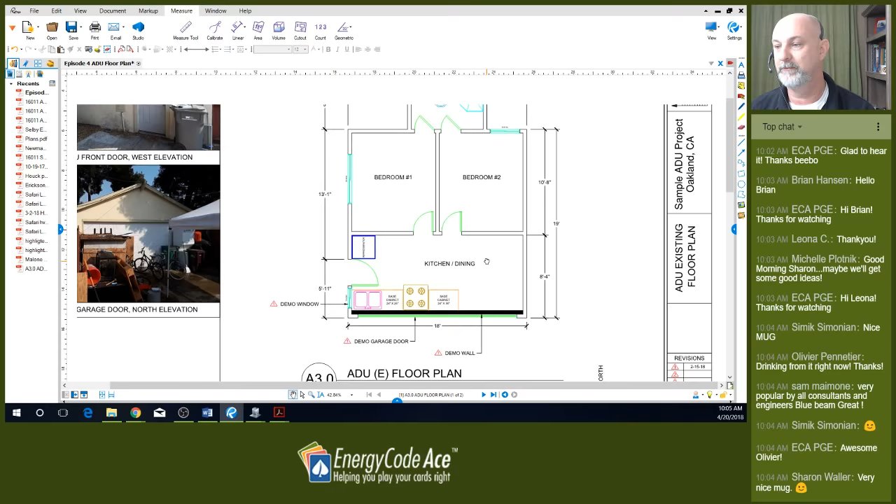It's a small garage that I believe was converted, and this is a code compliance issue. So they're going to be bringing this up to code and making it comply with the current standards. So very small ADU. It's an existing structure, and we're going to newly condition the space. So I wanted to bring to your attention some of the new information we've received from the Energy Commission.

I'm going to switch screens here and highlight the most recent Blueprint. This is issue 122, January-March 2018. You can go to the Energy Commission website and download this. Anyways, it's highlighting accessory dwelling units.

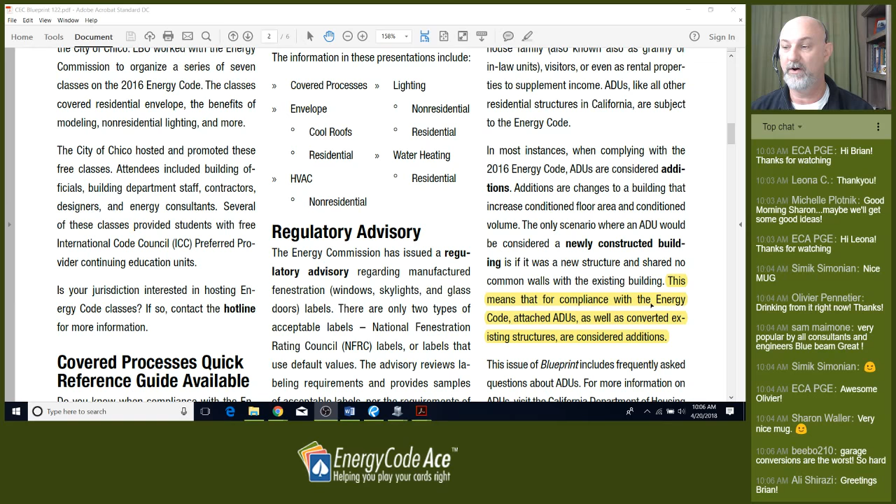So if you read through this, you'll see that a newly conditioned ADU, whether it's attached or detached, is considered an addition. It's not considered newly constructed. And if you see here what I've highlighted, this means that for compliance with Energy Code, attached ADUs as well as converted existing structures are considered additions. That has a huge impact on our compliance approach here.

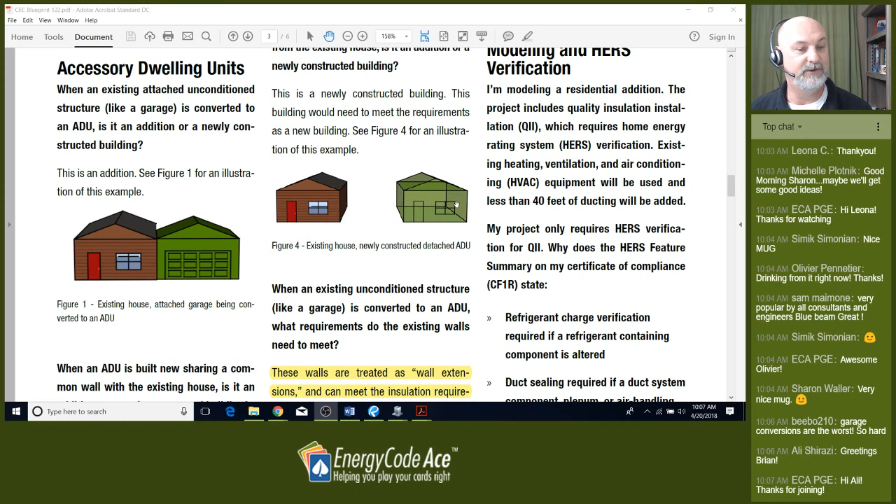So if you look through the blueprint here, it gives you some examples of what is an addition ADU, what is not considered an addition. If it's newly constructed, detached, that's new construction. So a couple of things to consider here, and we'll talk about the pros and cons of this, but if it's an addition, the Energy Commission says that all the walls of this addition are treated as wall extensions. If you're familiar with section 150.2(a), 1AI, and BII, this says that wall extensions can use the existing wall thickness.

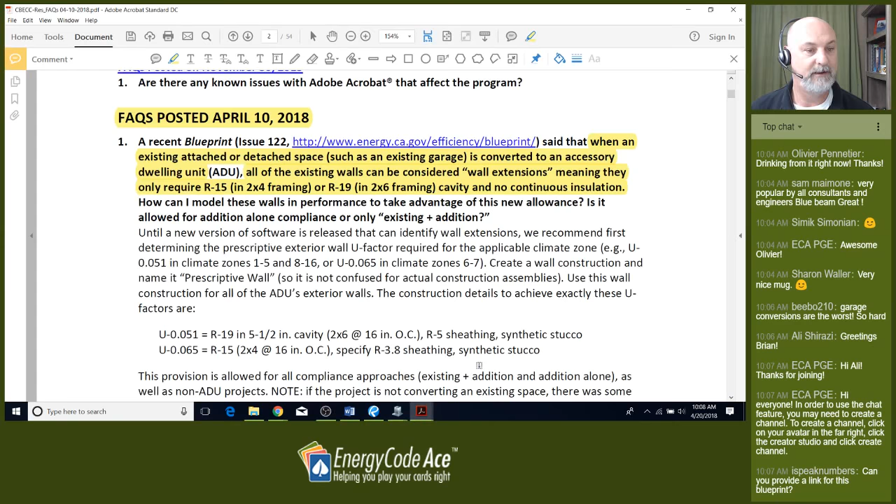So if you have a 2x4 wall, you're only required to put R15 in that wall. And if it's a 2x6 wall, R19 insulation in that wall. Now, that covers you for the prescriptive approach, and that may be a viable approach for this ADU. Today, we're going to be modeling it, and we have some new information. This is the CBECC-Res FAQ. This was posted April 10th, so 10 days ago.

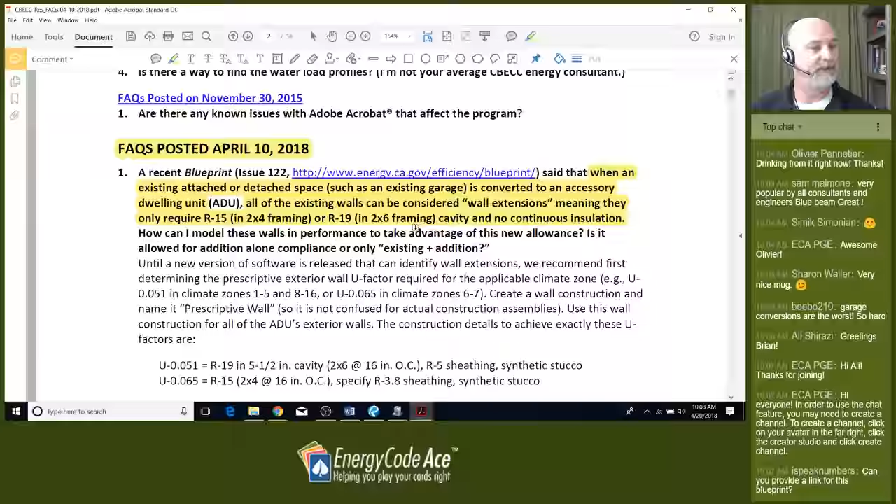If you haven't downloaded this, you can go to the CBECC-Res website, download the most recent FAQ, and it has some clarifications. So if you scroll down, you can see updated April 10th here. I'm just going straight to the title here. So a recent blueprint, that's the one we just looked at, issue 122, says that when an existing attached or detached space is converted to an accessory dwelling unit, all of the existing walls can be considered wall extensions.

Meaning that, here's our exception, R15 in a 2x4 wall, R19 in a 2x6 wall, and no continuous insulation. So the Energy Commission has issued the workaround on this, saying that if you have this situation, we know that the performance software cannot handle wall extensions yet. So in the interim, they've offered this solution. So model the wall based on the prescriptive requirement for your climate zone.

So if you're in any of the climate zones except 6 and 7, you've got to meet that 0.051 U-factor. And here's an example of a wall. This is the default wall for that 0.051 U-factor. And as well as if you're in climate zone 6 and 7, the 0.065 U-factor.

So the question here, a question about garage doors. What if one of the doors is a garage door? Garage doors are not going to meet the requirements here. You'll see here in a second on our ADU unit that garage door was removed and infilled with a stud wall. So yeah, if it's a garage door, your typical metal door is not going to meet the infiltration requirements nor the U-factor requirements.

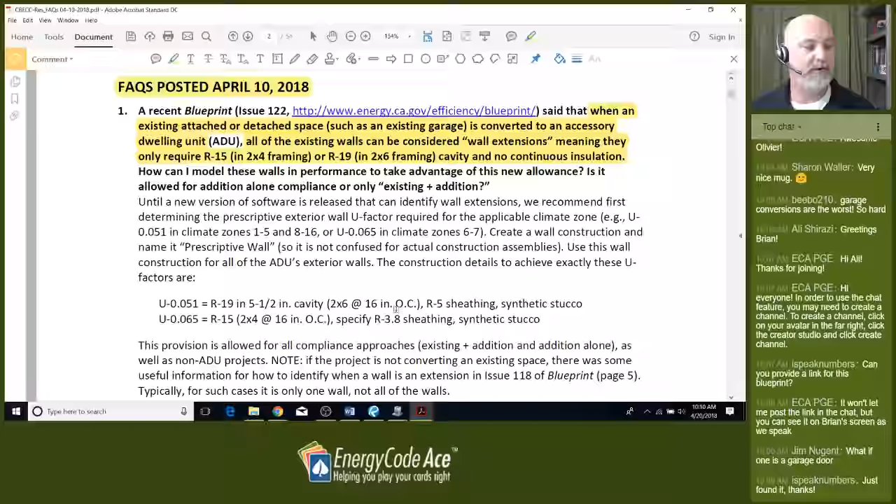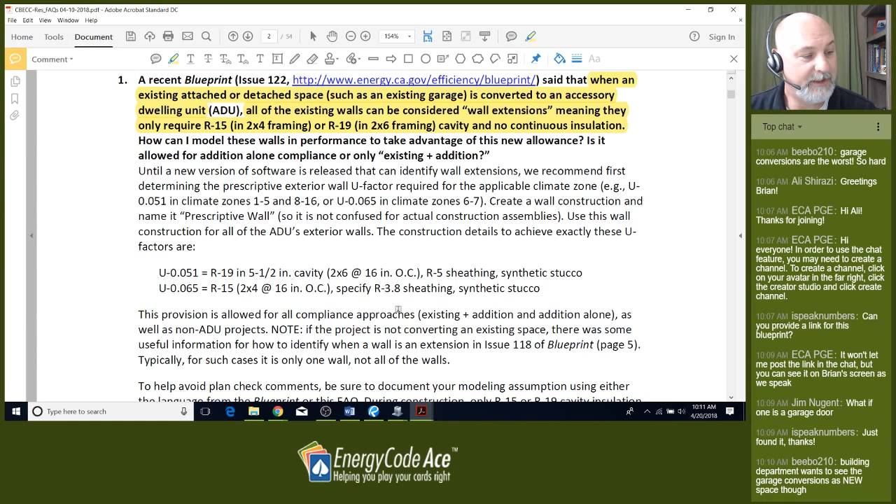All right, back to the FAQ here. So this is an allowable approach. It may not be the most ideal approach. You may have some pushback from the building department. They may say, explain to us how you did this. You modeled it with continuous insulation, but now you're saying it's not required. So the Energy Commission's given us some clarification on that, and I'm going to go over some of the wording that I used for this particular project to explain this away. I got a little bit more in detail than their comment of identifying the blueprint number and wall extensions and stuff like that.

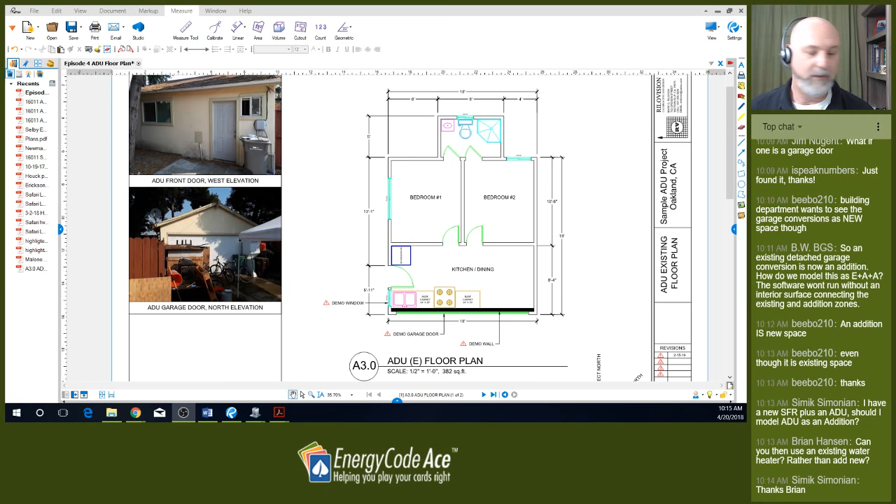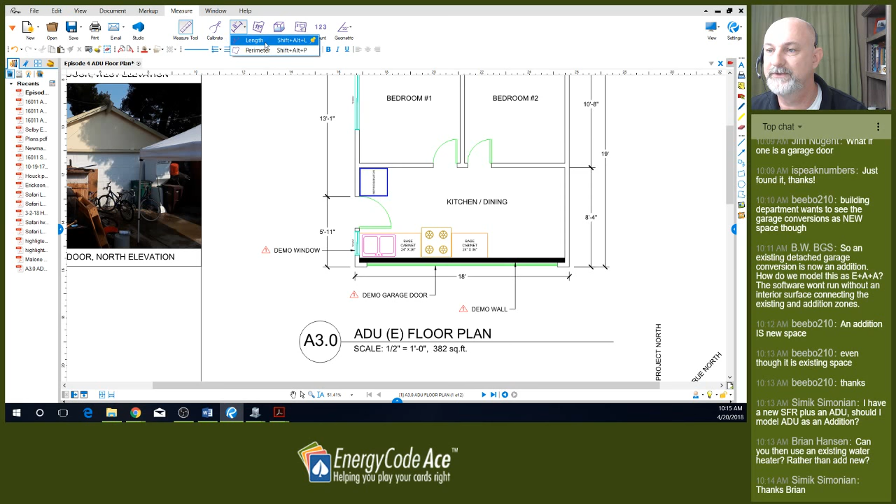So this is a pretty small building here. I'm using Bluebeam. So first thing I want to do, I want to calibrate my space here. So I've got a known dimension of 18 feet. I'm just going to calibrate my workspace so that all my dimensions are correct. Say that that's 18 feet. Good. I always like to check one of my dimensions just to make sure that I got it correct. So the beauty about Bluebeam, it'll snap to endpoints, which is really helpful. So it scales 19 feet there on my side dimension, so I know I'm good.

First thing I want to do is my area takeoff. So if you look at the scope of work here, it's a pretty small addition, slab on grade, attic roof, as simple as you can get here. So the plan says 382 square feet, and I could do this probably manually, but I'm just going to do an area check just to make sure that we're on the money. So stand by here as I work my way around the building. Just double click to finish that area, and I get 382 square feet. How about that? We're right on the money.

Perimeter length for our slab, if we have 382 square feet, I'm just going to grab this linear perimeter dimension, just work my way around the building. I could also just add these together. 19 plus 5 is 24 feet in one direction. I got 18 in the other direction. Add those together, multiply times 2. I get 84 linear feet.

All right, question in the chat. Does the new wall replacing the garage door require footings if the current foundation is otherwise sound? That's more of a structural question, Steven. Probably have to ask an engineer on that. Really, if the header was spanning the garage door, it's only the dead load of the wall there. So I don't know. Probably a better question for an engineer on that one.

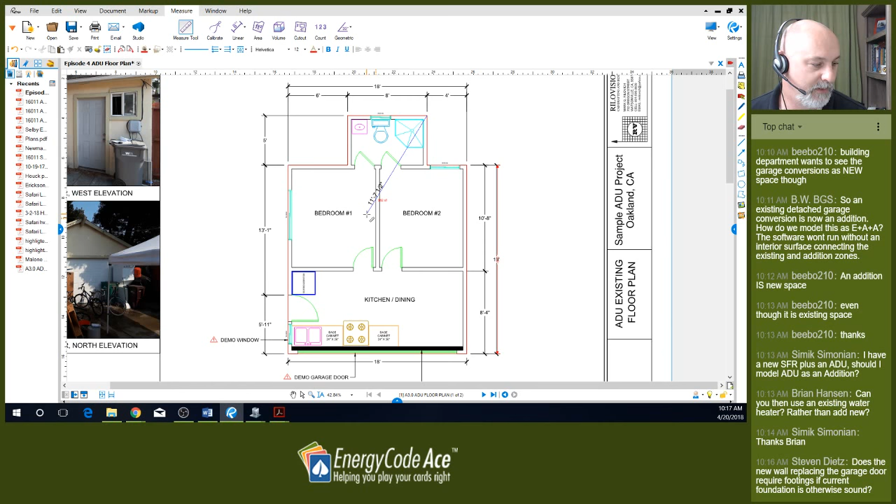So okay, let's do some wall takeoffs. Our orientation here, we've got a north arrow on this plan. I'm going to call the front this left side here, where this door is going into the kitchen. That's going to be my building front. So I'm going to check on my angle. I'm going to snap to the 2 endpoints of the true north, and then I'm going to hold the shift button down and drag the length out this way.

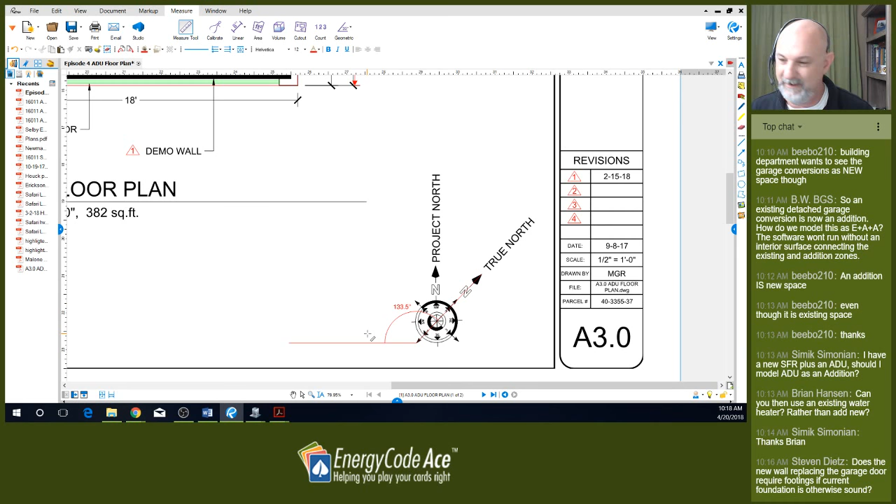So it's saying it's 133.5 degrees negative of north. So what I'm going to do is take 360 degrees, and I'm going to subtract 133 degrees. Yeah, I think I went 133 degrees. So that gives us a front orientation of 227 degrees.

If you're looking at my over-the-shoulder here, I just write down on my takeoff sheet. Now, you may enter this in Bluebeam, but I like to use just a grid pad. It's really fast for me to write down my information.

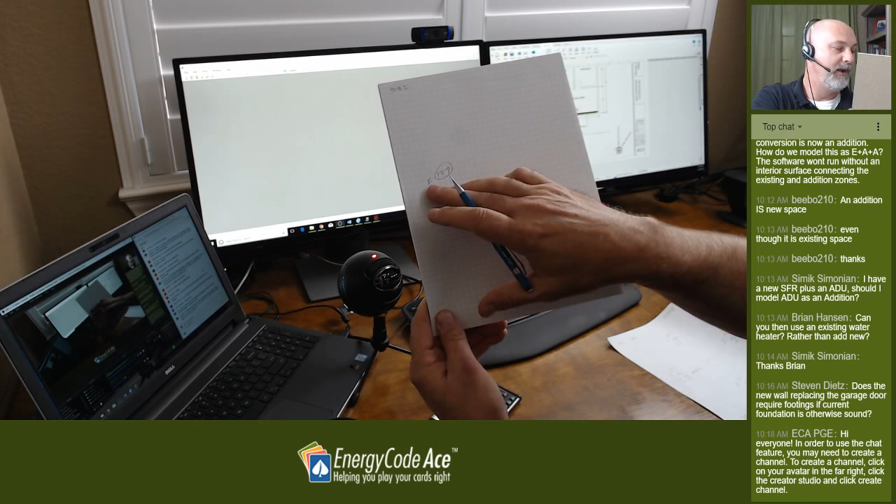I keep my front in the same relative area as the plan is, so it's going to be on the left of my page. Then I'm just going to work my way around. Left is going to be clockwise, back is going to be around, and then right.

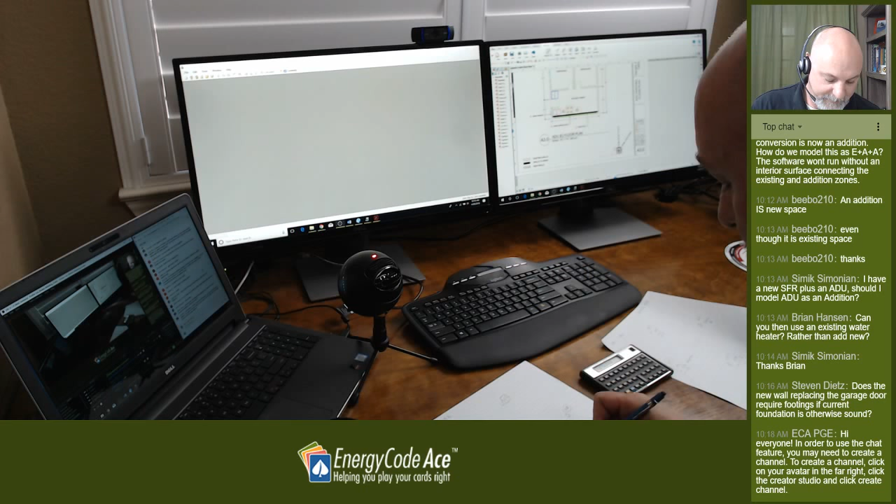So you can just add those. Those are all 90 degrees away from each other. So 227 degrees, add 90 degrees to that, our left side is going to be 317. Add 90 to that, it's going to be 47 degrees. And add 90 to that, 137 degrees. So that's our 4 orientations.

Let's do our wall takeoffs. Our front wall is 24 feet. Sorry for the jumpy screen there. So our front wall is represented by this wall here and this little wall of the bathroom. So 24 feet, let me go to my second plan here.

We've got some more information. That was the demo plan. So our ceiling height is 8 feet, so I'm going to take that 24 times 8. If you do that a lot, you know that's 192 square feet.

So it's the wall length times the wall height. I'm going to do my left wall, 18 feet times 8 gives me 144. My back and my right wall are the same as my front and left wall, 192, 144.

Let me get back to Bluebeam. All right, so we've got our wall takeoffs. Let's do our windows. I like to start with the front wall, and I go from right to left. Always go clockwise.

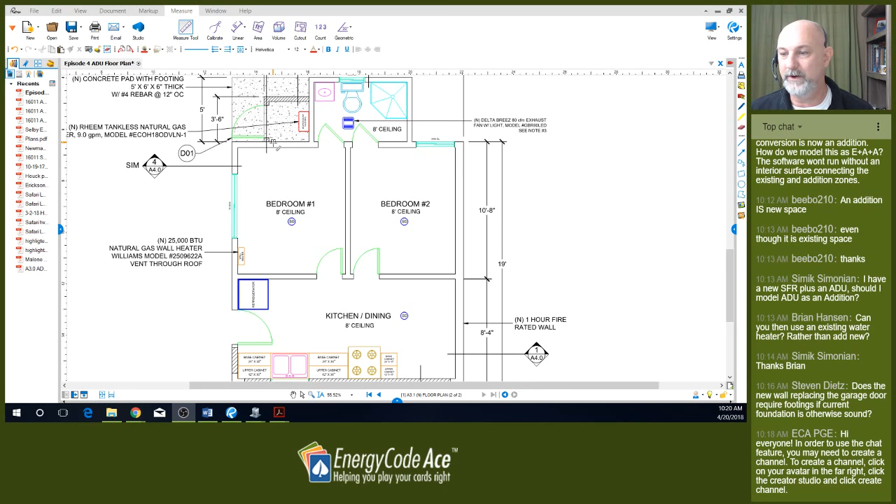That just keeps it straight in my brain where I'm at. If I ever have to go back in and edit that model, I know exactly where I left off and which window I'm talking about. Fortunately this is a pretty small model, so let's take a look at these windows. This is a 5030 window, so it's 15 square feet on our front wall. That's the only window there.

Our rear wall here, let me see.

We got a question. Christian says, if ADUs are treated as additions, do the CRRC cool roofing requirements still apply then? If you were altering the roof and you were altering more than 50% of that roof, then you would be required if there was a cool roof requirement in your climate zone. So yeah, you would still be compared to that. So in the software, you'd have to tell it you're altering the roof more than 50%.

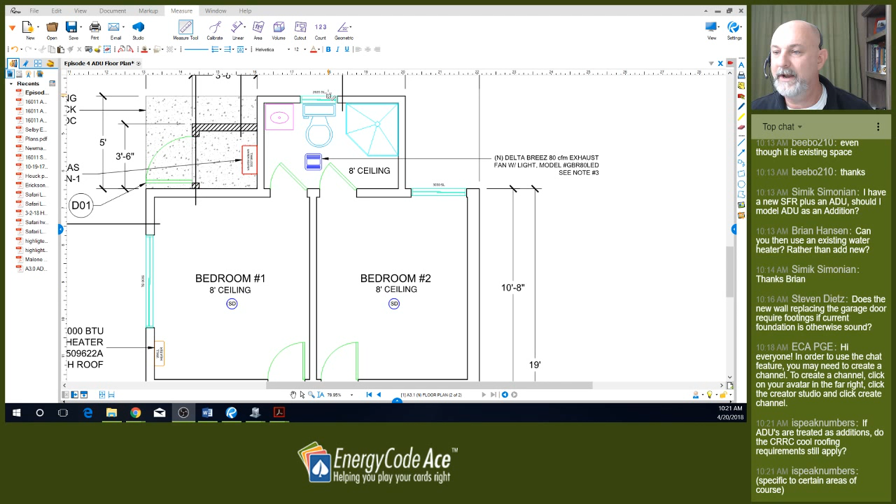Okay, back to our back wall. We've got a 2020 window there, pretty small wording, so we got 4 square feet of window there. A 3030 window here, 9 square feet there. Back to our left wall, there are no windows on this left wall here, so we can just put a big 0 there.

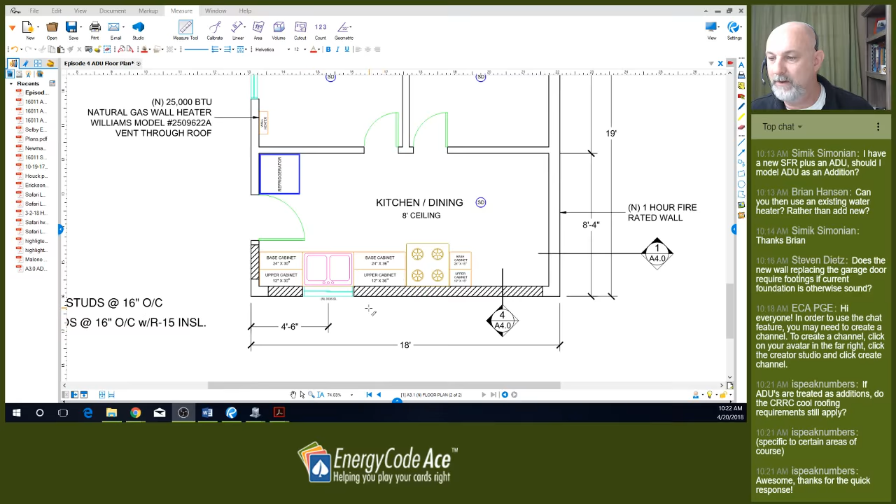And our right wall has a 3036, that's 10.5 square feet. As far as my accuracy goes, usually I'll go to the first decimal point. If you're splitting hairs, you go 2 decimal points. I don't know, some people may want to go that far. I think EnergyPro rounds off to the nearest single decimal point, so I usually keep it there.

Okay, so we got our window takeoffs. We have a door here. I don't see an opening width here. In lieu of this, I'll probably bring this up to the client and say, hey, how big a door is that? Let's just do a dimension here. Looks like a 2.8 door. So that's a 2.8, and if we go back to our original picture, we see that door is a metal door.

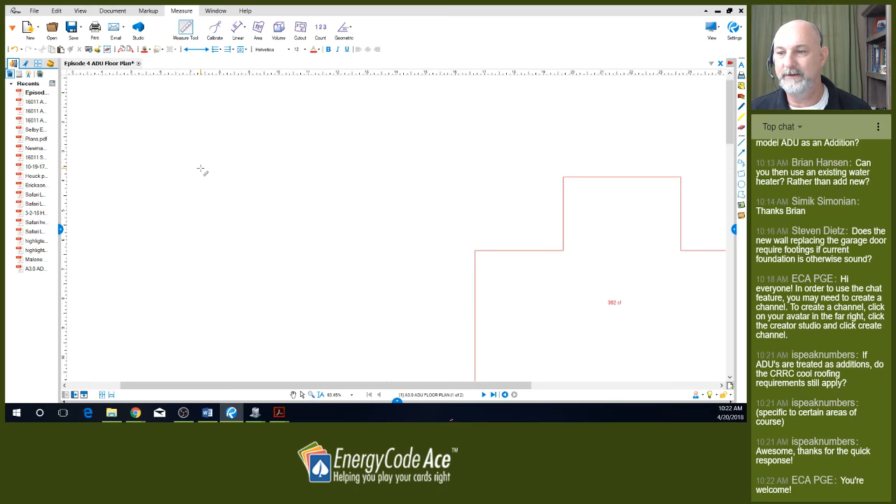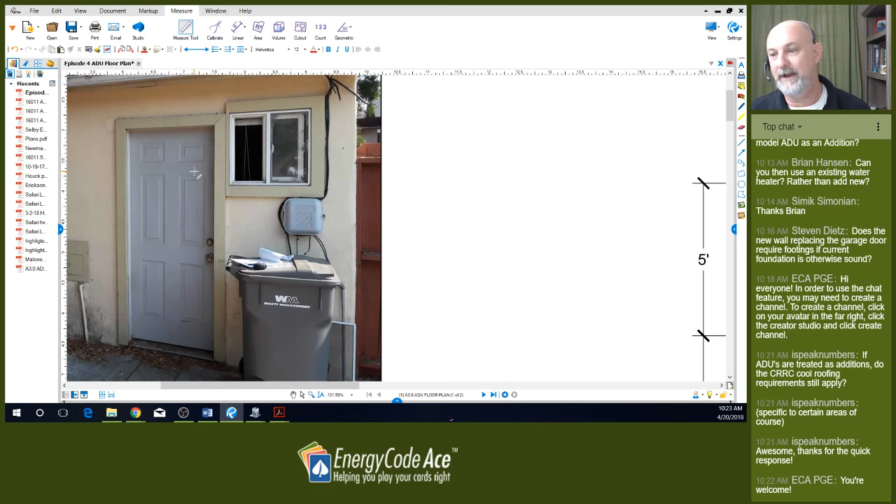For modeling purposes, I'm going to assume this is an insulated core metal door, but I don't know that. It might be something I could ask the client though. So for modeling purposes, we're going to call that an insulated door. So a 2868 door is going to be 17.8 square feet.

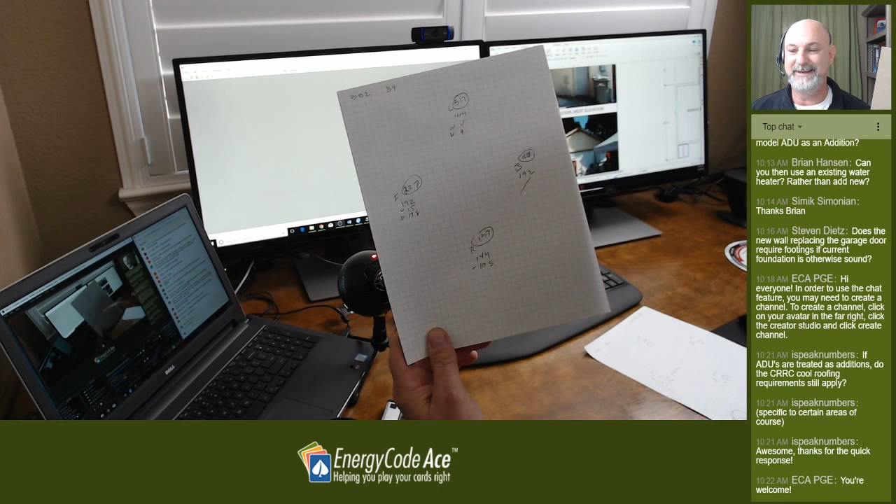Okay, so we've got our takeoff here. I'm going to switch to my over-the-shoulder look here. Very simple, that's my data collection. I've got what I need to input into EnergyPro so far, minus any other details that I might be looking at. So all right, let's switch to EnergyPro.

And I know in the past I've done the wizard. This time I'm just going to create this from scratch. Some people like to create things from scratch, some people like to use the wizard. I'm not partial, sometimes I do a little bit of both. So this is our building, I'm going to call this our sample ADU here. As far as my front orientation, I'm going to call that 227 degrees.

I've done a little bit of background on this. This project is located in Oakland, California. There is natural gas available, so we're going to keep that there.

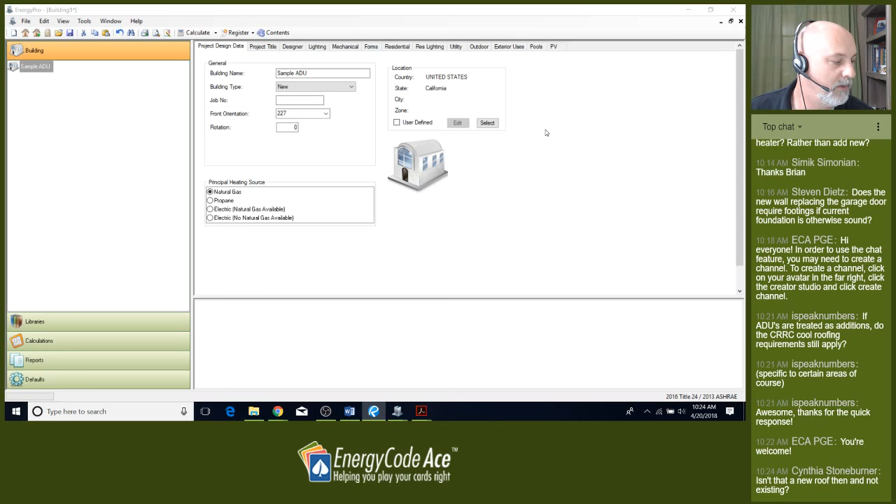It's like Cynthia says, isn't that a new roof then, not an existing roof? Not sure what you're referring to, Cynthia. Are you referring to Christian's comment? Yeah, you can give me clarification on that. That'd be good, so maybe I can answer that then. So I'm going to go down to Oakland.

Don't do a lot of projects in Oakland. Not Oakdale, that's Climate Zone 12. So Oakland is Climate Zone 3.

All right, so we got our basic information. We're going to leave the project details for right now, leave that empty. Go over to our residential tab, see if we have anything here. We're not proposing any cooling ventilation. It's not prescriptively required, well, let's talk about that in a little bit.

So good, let's go ahead and jump in and add a water heater, add an HVAC system. We're going to go in and define these here. So we'll call this DHW system.

And sometimes EnergyPro lags when I type in stuff here, so I don't know if anybody else has that. Hot water system, okay, we're going to hit our DHW tab. We've got some information on the plan about our hot water heater. Let's see, let me go to our Bluebeam screen and zoom in.

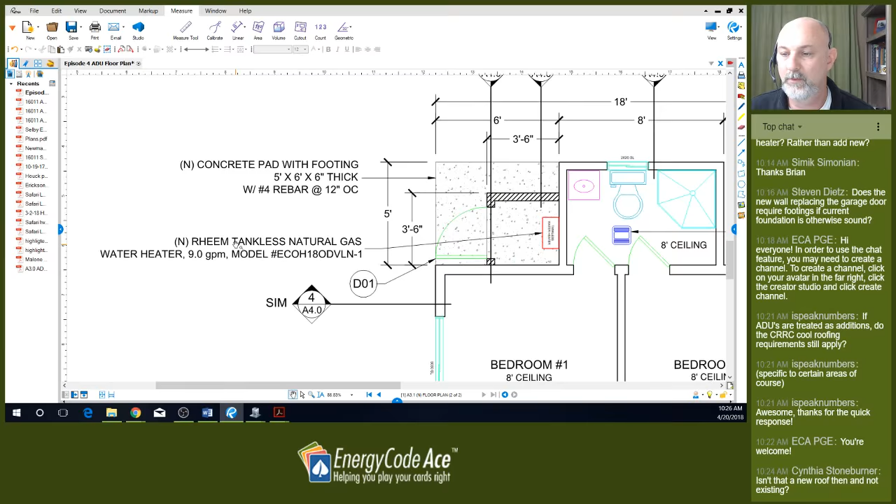We've got a Rheem tankless natural gas water heater, 9 gallons per minute, model number ECOH18. I went to AHRI and looked up that water heater, and I'm going to share that with you here in just a second. Let's see, Rheem.

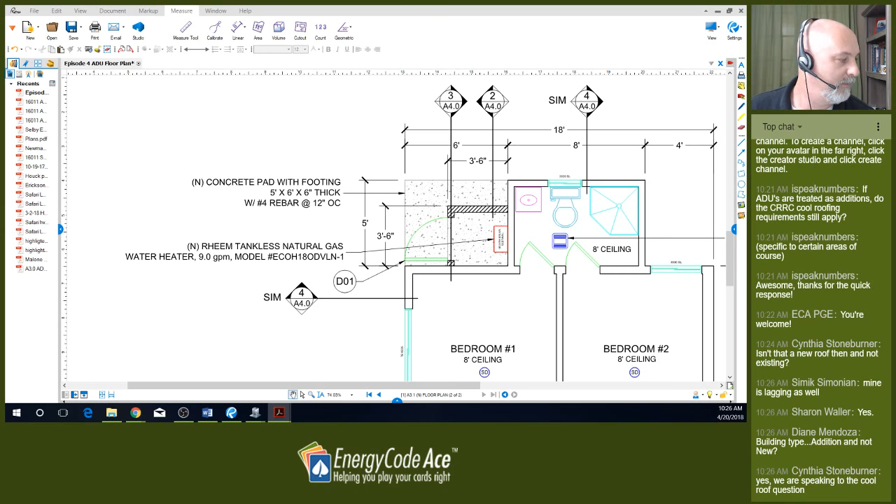Questions, Cynthia says... oh, Diane says building type, addition or new. Yeah, we'll get back to that building type. Yes, we're speaking to the cool roof question.

Let me see if that... if it's new construction, it would be considered a new roof. If it's an existing structure, is it considered a new roof or an existing roof? In this case, being that it's an addition, probably consider it a new roof. So in that case, the roofing prescriptively would be, if you had a cool roof requirement in your climate zone, prescriptively you're going to be compared to that in the standard design. So you might take a little bit of an energy penalty if you didn't do that.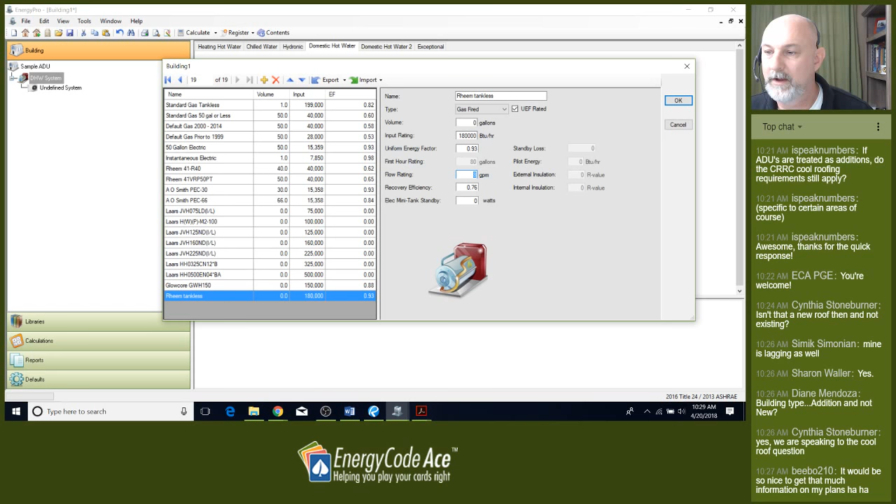Our UEF is 0.93 -- don't make the mistake of typing in 93, right? That means you're 100 times more efficient than 0.93. So I've seen that happen sometimes. And our first hour gallons per minute rating on this, I believe it was 9 gallons on this one.

Okay, we're going to choose that water heater. We're going to leave our distribution standard on that. Let's get into our HVAC system. I'm going to change this to HVAC system, this is going to be new.

I think I already saved this, but let's go back to our plan and take a look at what that is. Bluebeam. We're proposing to put in a wall furnace here, 25,000 BTU natural gas wall heater, Williams model 2509622A. Went and looked that one up on AHRI.

Now, they may have some issues providing direct heat to both bedrooms here. Couple solutions to that, they could put some jumper ducts in there, but in this case, I'm going to model it the way the customer sent it to me, and if there were some issues, I'm going to bring it to the customer's attention.

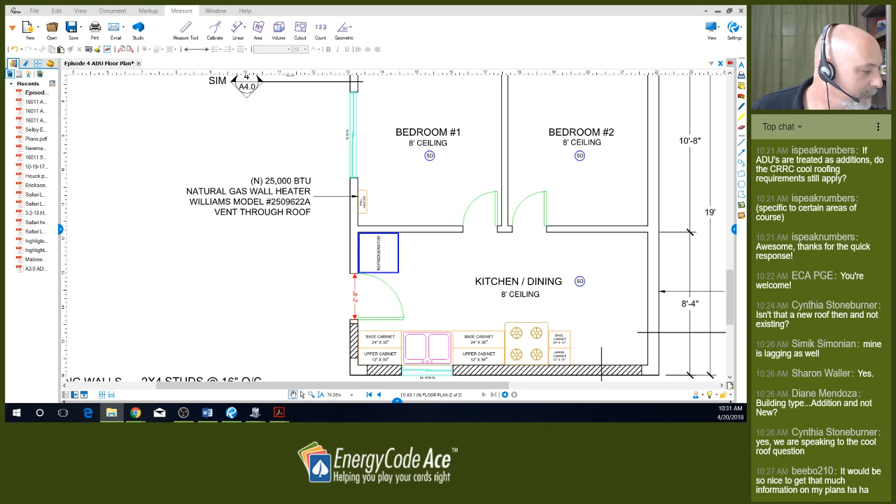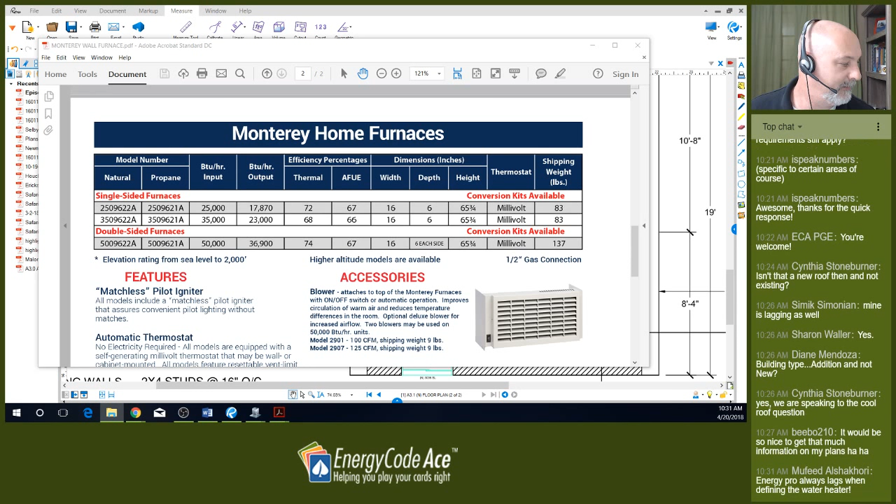So let's get up our cut sheet. This is the manufacturer's cut sheet for that particular wall furnace. I went to AHRI and got the AHRI certificate for that. That is this one right here.

So this is a wall furnace. I'm going to come back to EnergyPro and let you see my inputs. I'm going to copy this existing wall furnace, and I'm just going to label this wall furnace. This is a split DX system. It's a gas furnace, gravity wall type. Our BTU input is 25,000 BTUs. Our efficiency, keep in mind, this is an AFUE of 67%, so that's input of 0.67.

Nothing else, we don't have any cooling in this. My cooling is set to 0. That's going to tell the software that there's no cooling installed and document that.

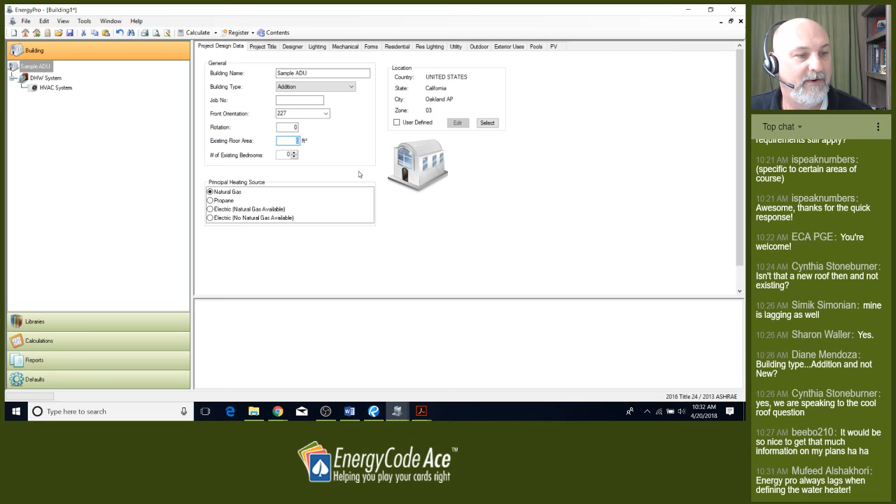I'm going to go back here and go over what I forgot to do, which is say that this is an addition in our building type. So make sure that that's selected. It's going to ask me for what the existing area is. Now, you may have this information from the client. I went to Zillow, typed in the project address, and found that information.

That information was: existing house was 1,052 square feet. So that's just going to give it relative to the project that it's being added onto. And it was a 2-bedroom house.

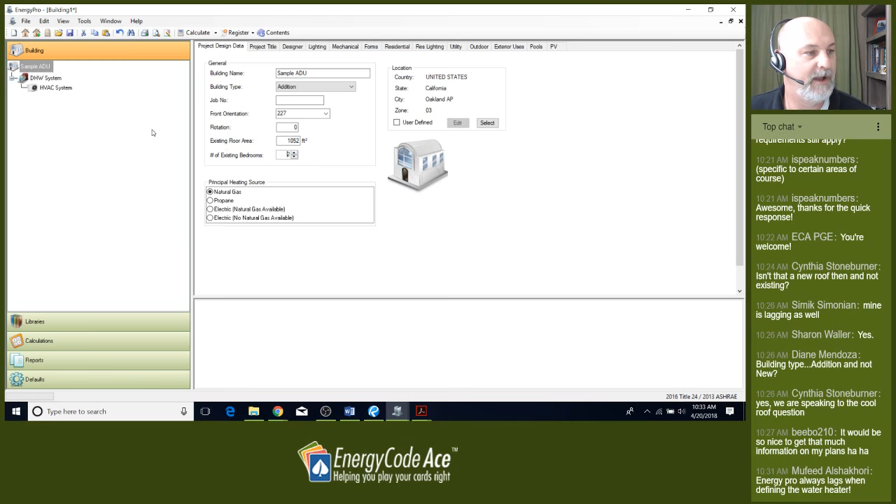Okay, looks like we probably got some more questions. Yeah, Zillow is a lifesaver, right, when you're looking for existing information.

So love it. Okay, so we got our mechanical systems input. Let's start with some zones here. Undefined zone, this is our new zone, I'm just going to call this ADU. All right, that's our condition type, it's single family. Let's go through and make sure that our building story information is correct.

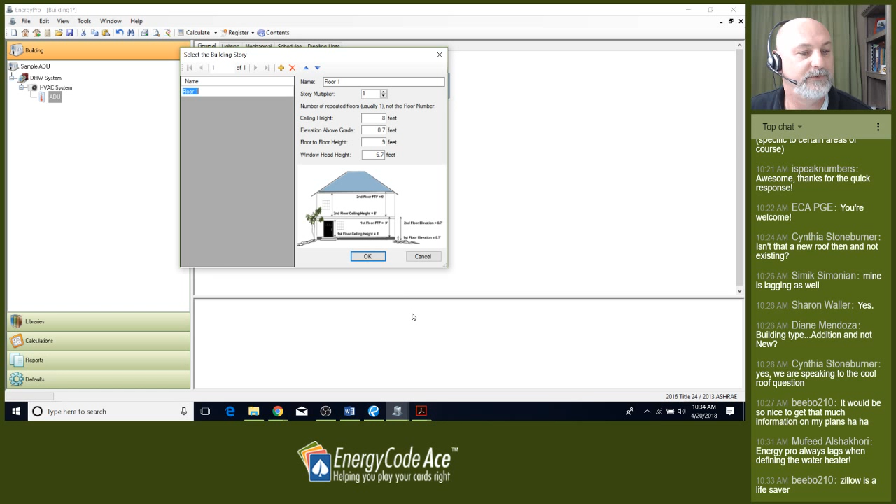Ceiling height is 8 feet. Elevation above grade 0.7, that's basically a slab saying it's 8 inches above grade. Floor to floor height is 9 feet, so anything, this floor to floor height has to be greater than the ceiling height. Window height is 6'7". I don't need a second floor on that, it's only a single story building. And let's just say okay.

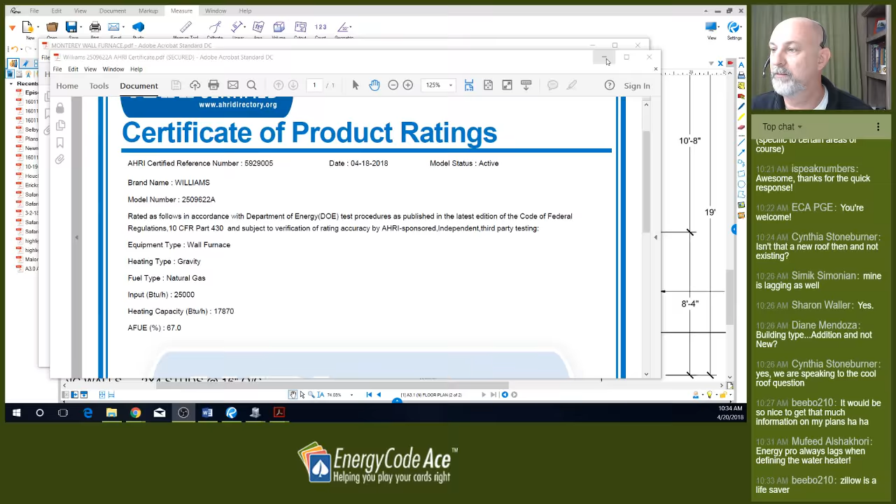I always like to do my dwelling tab right now and define my number of bedrooms here. If we look at our plan, we'll go back to a Bluebeam screen. This particular plan is 2 bedrooms, right? So there's a 2-bedroom ADU. I'm going to input that into EnergyPro. It defaults to 3 bedrooms, so just go back in and change that to 2.

I like to turn the appliances off. There's no credit, no penalty for using appliances or not using appliances. In this case, whatever is input in the proposed design is equal to the standard design, so there's no consequence. I just like to turn them off. That's my preference, your preference may be to turn them on. So that's just the way I do it.

Okay, we got our zone done. Let's add a room, and our room is going to be our ADU unit. So we're going to model the whole unit together. We know what our square footage is, right? 382 square feet. So it'd be interesting to know if people are modeling along with me as I go.

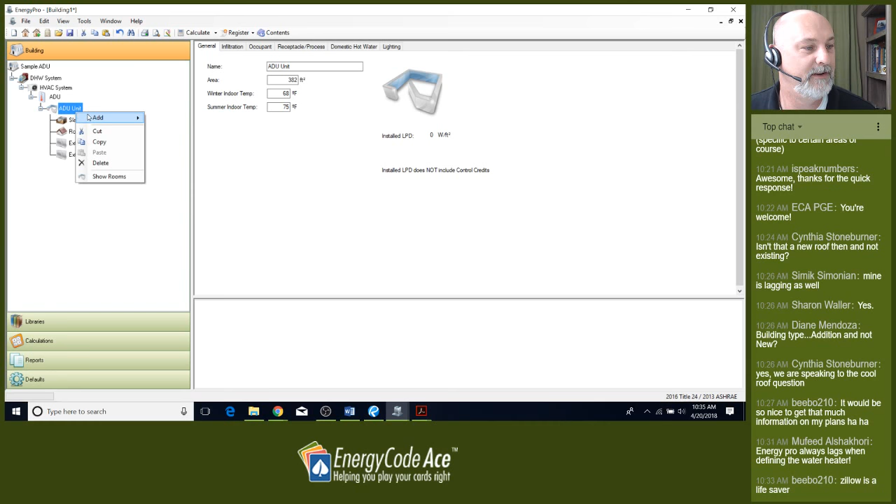All right, I'm going to enter my slab area, my roof area. I know I have 4 walls, I'm just building my tree here, right? I'm just entering this information. So now I need to go in and define all these areas.

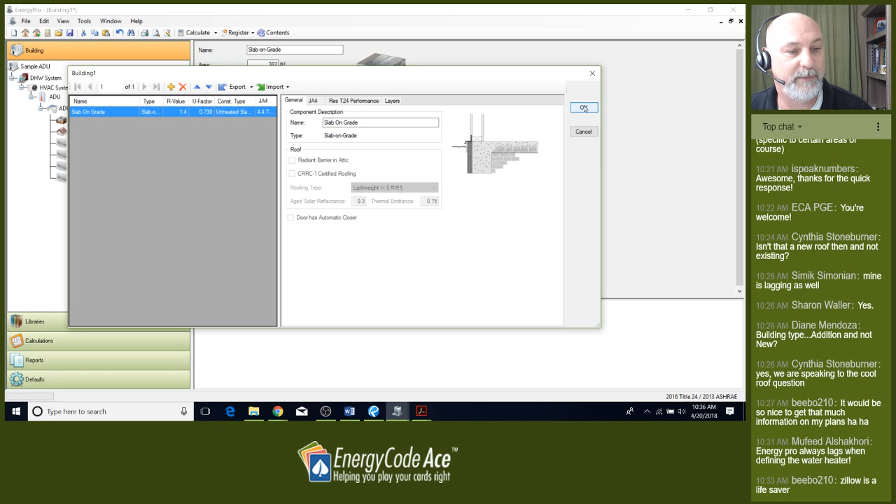So my slab area is 382 square feet. We know it's new, the assembly is slab on grade. It's non-heated, so I'm good with the default value here. If I was going to do a heated slab, I would go in and say, hey, I would import a heated slab and use that. But right now, this is an unheated slab, no slab perimeter insulation, it's just a slab here.

Okay, my exterior perimeter, that's the perimeter around my floor area, 382 square feet of area and 84 linear feet. I'm going to keep the default 20% exposed on this. We don't know what coverings they're going to be putting on it, so we're not going to make any claims there for thermal mass. Our roof area, again, is the same, 382 square feet.

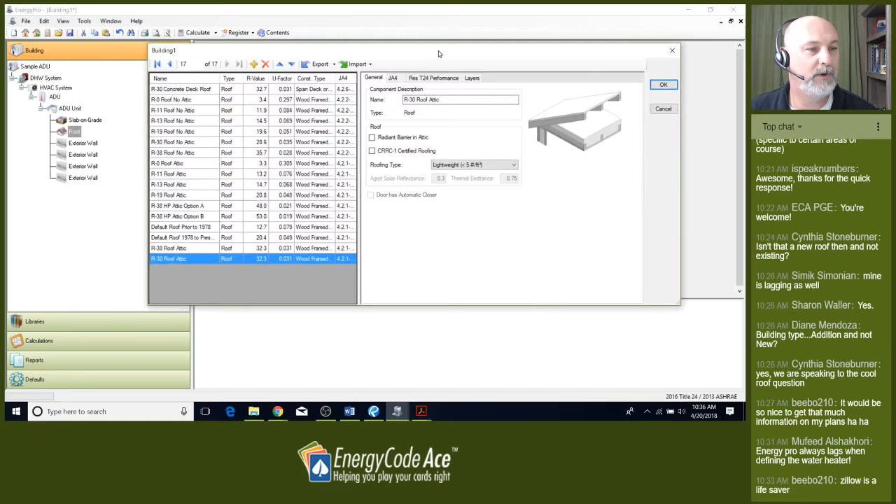It's a new roof. Now, what are we doing here for roof attic? So we could look up and see what the prescriptive requirement is for climate zone 3. You know, I know the client, I've had conversations with the client. They're okay with putting our R-38 attic insulation in here.

They're not putting a high performance roof here. In this situation, we're only adding ceiling insulation, R38. Our framing is 2x4, 24 inches on center. We're good there. We're not putting in a radiant barrier. We're not putting in a cool roof at this point. We know that we may have some cool roof requirements, but we're not going to be doing that.

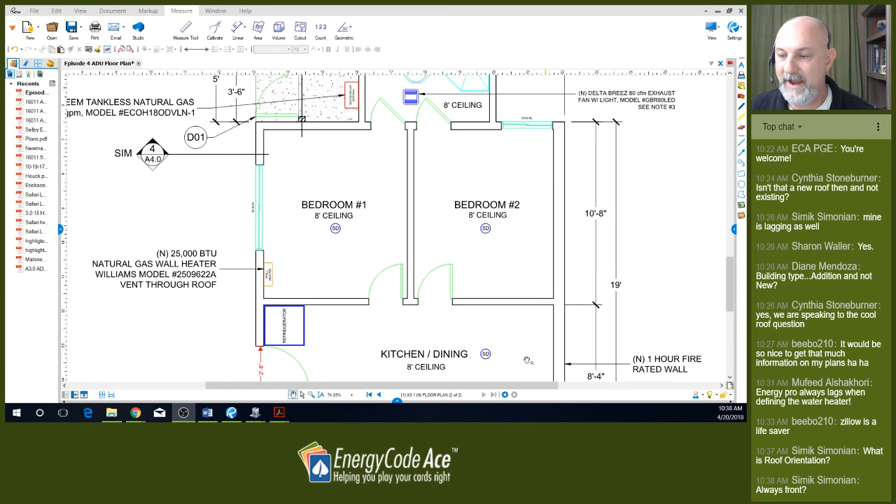Orientation is relative to the front, 227 degrees. Also, our slope. This is important. If you don't put in a slope, the software says, look, if you're saying it's an attic space and there's 0 slope here, and if you had ducts in that space, then you wouldn't have enough room there. So what is our roof slope? Let me go back to Bluebeam. The only thing I have that shows kind of a roof slope is this front elevation.

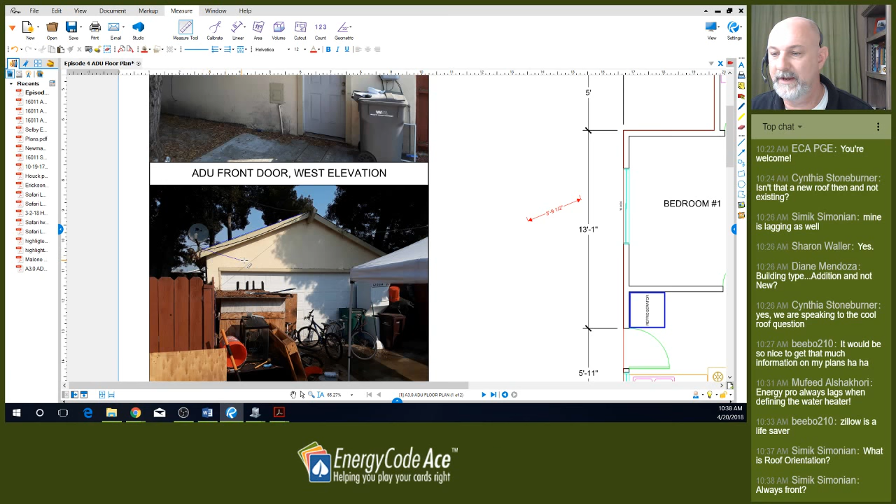I know this picture is a little skewed, but I can roughly guess. I'm guessing it's a 4 and 12, but it might be a 5 and 12. But you can come in here and grab your angle and say, just as a gut check, it says it's 19 degrees. If it's at a skew, it's probably showing that it's a little bit steeper. So what is a 4 and 12? 18 point something, 18.6. So I'm going to say that's a 4 and 12 roof. It would be upwards to 20, 20.2, 20.3 for a 5 and 12.

Simik says, what is the roof orientation and is it always front? If you're doing an attic roof, yes, the orientation of that attic roof would be the front orientation. Now, if you're doing a cathedral roof, and if this particular roof over here was a rafter, you would need to model the area relative to this rafter in this slope in this orientation, and this rafter relative to the slope and orientation. So you'd break the area in half, and model one facet one direction, one facet another at their respective roof pitch. But if it's a vented attic or an attic roof, then orientation is the front orientation.

Okay, forgot to go in and do my distribution system for my HVAC. In this case, it's new. My heating distribution is ductless, no fan. Let's see, nothing else on here. We have no HERS verifications. We're good. All right. Back to our areas. We've got our slab, our roof, our exterior wall. I'm going to start with my front wall. I always like to start with front first and go clockwise. I'm going to call this front wall.

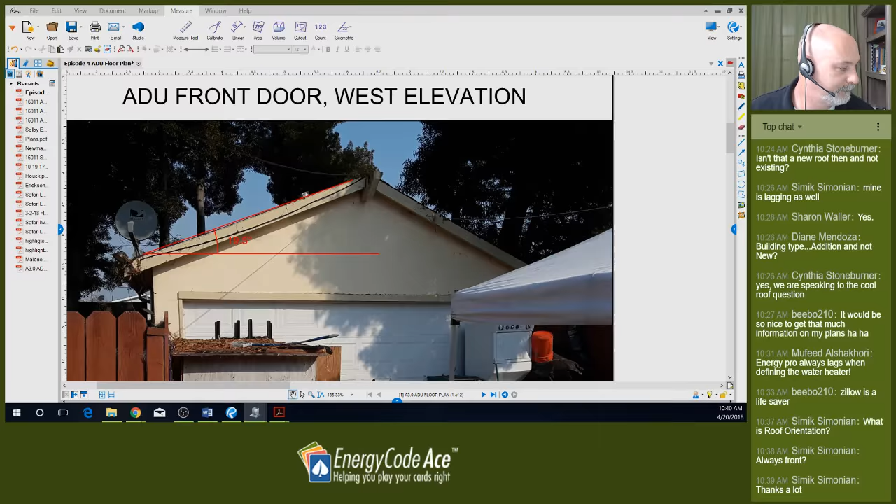If we go back to our takeoff information, we know that front area is 192 square feet. It's a new surface. Our assembly type. Now, we have to refer back to our CBECC-Res software. We are in climate zone 3. Climate zones 1 through 5 and 8 through 16 have a 0.051 U-factor. So the CBECC-Res FAQ is saying we need to model that 0.051 U-factor this way: R19, 5.5 inch cavity, 2x6, 16 inches on center with R5 sheathing, synthetic stucco. That's the default 0.051 U-factor for that wall. So we need to model that. Right now I got a bunch of stuff in my file here.

Brian says, are you saying that all cathedral roofs are supposed to be modeled separately based on orientation? Yes. Each individually facing cathedral roof facet needs to be modeled according to its slope or pitch and its relative orientation, not just a single orientation. All right, so we're going to copy this wall here. We're going to call it our R19 plus R5 wall. And we're going to go in,

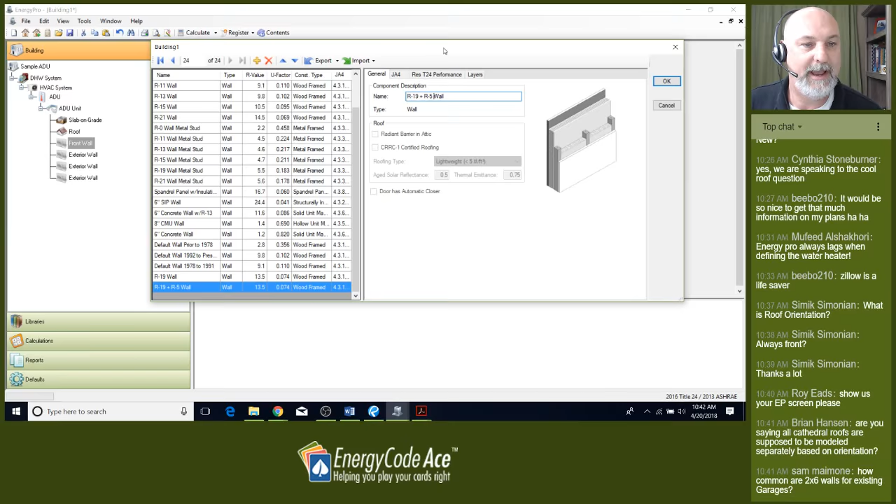Yeah, how common are 2x6 walls in this? Actually, we're not going to model a 2x6 wall. Thank you, Sam, for bringing that to my attention. My project says here that existing walls and new walls are all 2x4. So what we need to model is an R15 wall, right? And if we go back to the CBECC-Res FAQ, it's saying model the 0.051 this way. We can model it as long as we get the 0.051 U-factor.

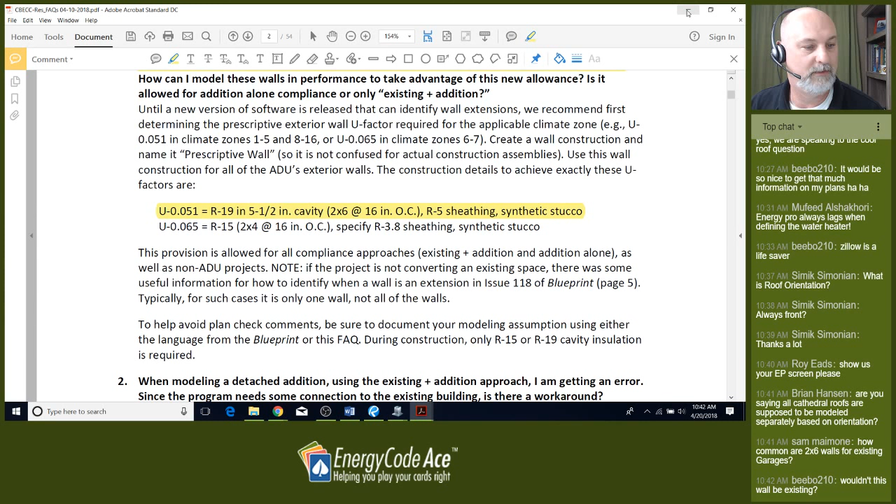We're fine. I'm going to model it with the 2x4 wall, but yeah, let's keep it this. CBECC-Res says model it this way, and then provide clarification to the plan checker, and we're going to do that in the remarks. So we're going to click on the Title 24 Performance. Right now we have the R19 5.5 inch cavity, 2x6, 16 inches on center.

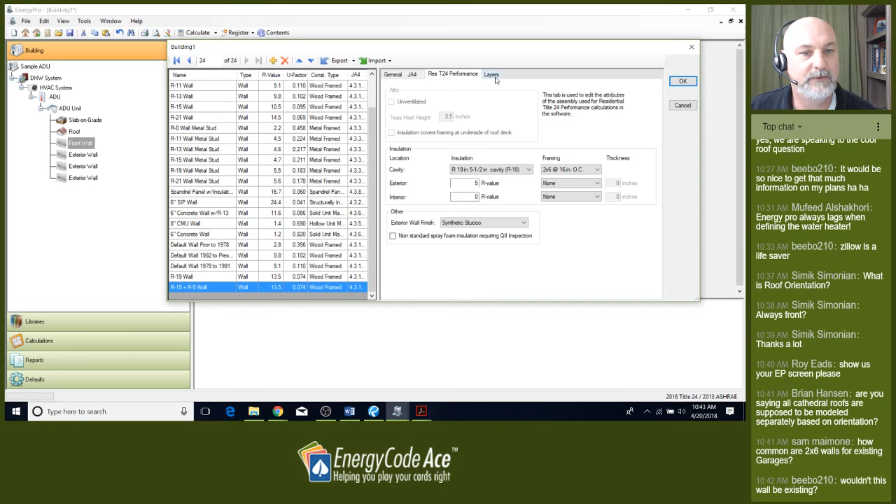We're going to add the R5 continuous insulation to the outside. We're going to select the synthetic stucco. Okay, so that's going to give us our actual assembly here. We're going to say that the orientation is 227 degrees. The tilt is 90. Now, if you notice, EnergyPro has this extension to an existing wall button.

That's only for the prescriptive approach, so it's not going to do anything. If you have the prescriptive module from EnergyPro, it's going to identify that as a wall extension. In this case, oops, forgot to change that. That's actually an R19 wall. In this case, that is not functional right now for the performance approach. So let's add our windows to that front wall.

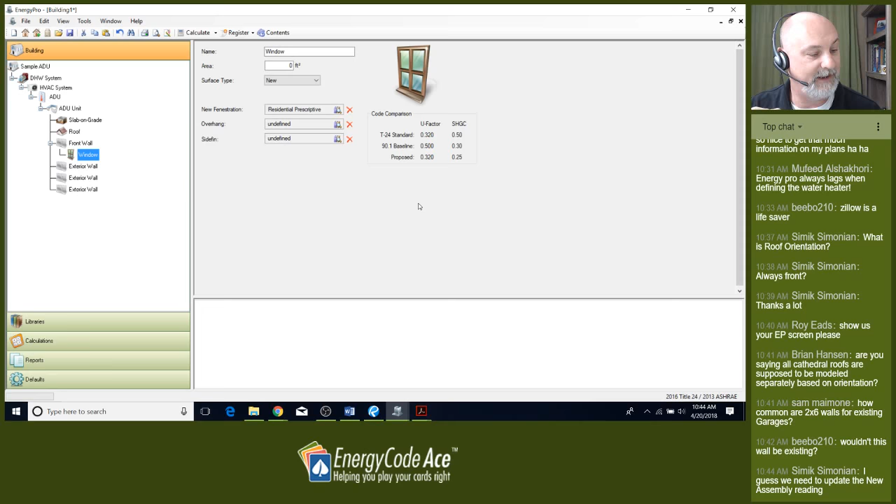We know we have a... see, Simik says, I guess we need to update the new assembly reading. I'm not sure what that means, Simik, but yeah, if you can clarify that question. And then wouldn't this wall be existing? No, actually, since this is an addition, it's a new wall. It's not an existing wall. The clarification from the Energy Commission says you can treat that as an existing wall and apply the wall extension exception.

So, all right, good. So we got wall 1. We've got our first window. We've got 15 square feet of window on the front wall. For right now, if you look at the prescriptive requirements for climate zone 3, the U-factor is 0.32, but it doesn't have a solar heat gain coefficient requirement. In that case, the software defaults to a 0.50 solar heat gain coefficient. So in this case, if you use the 0.25, you're probably going to get an energy penalty for doing that. So just want to bring that to your attention.

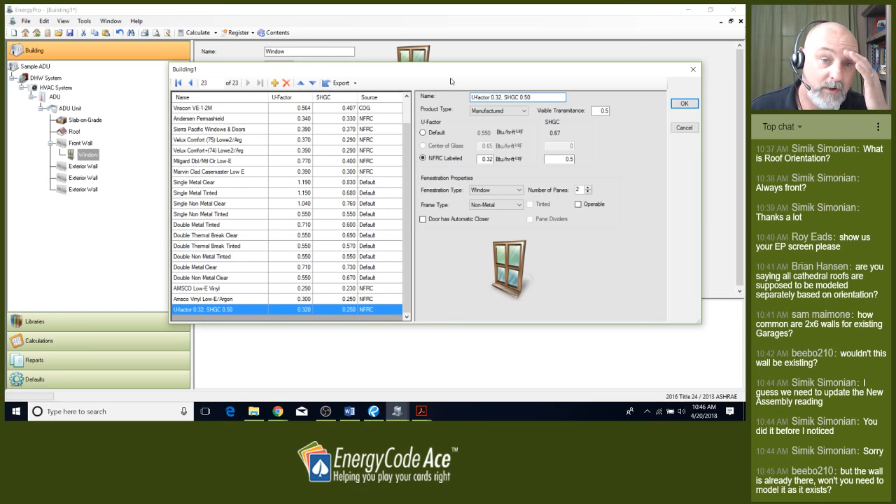For this, I'm going to model this as a 0.50, and I'm going to change this residential prescriptive to something a little more descriptive. U-factor 0.32, SHGC 0.50. Now, I definitely want to communicate to the client that, hey, we've got a 0.32 U-factor window, but the 0.50 SHGC on that. So that might be a more risky way to go. In this case, I want to make it clear to the client.

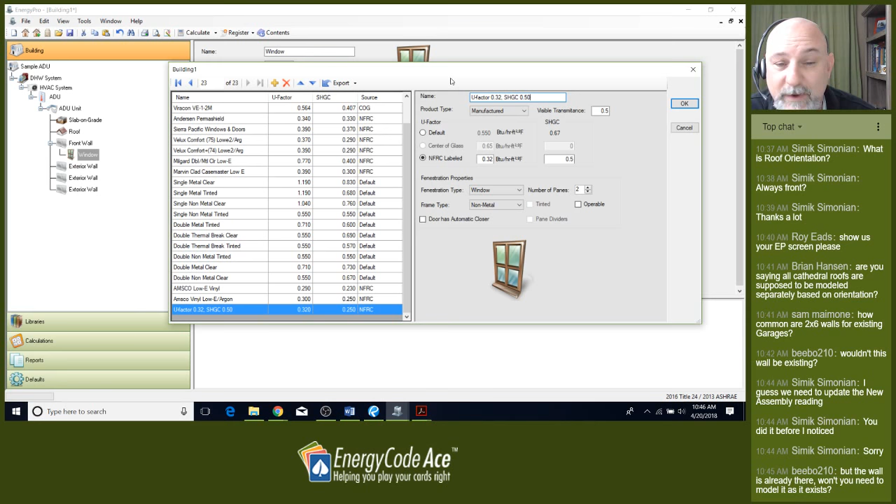But if they install the 0.25 or somewhere in that range solar heat gain coefficient, it's probably going to see an energy penalty in climate zone 3. So I'm just predicting that up front. But we're going to go this route here for now and show you what the results are on that. So you guys can decide on which strategy you're going to use with your client on window performance. All right, so we're not going to model overhangs in this one. Episode 2, I believe, has how to model overhangs and side fins.

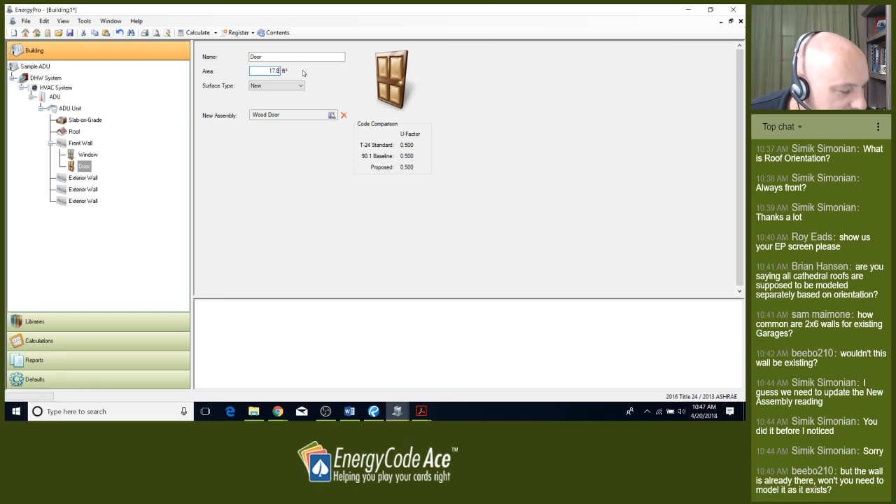So no other windows on the front, but we do have a door. Let's add that door. This door is 17.8 square feet. Looks like beebo210 says, but the wall is already there. Won't you need to model it as existing? Yeah, I agree with your logic on that. It is already there. It's an existing unconditioned structure. We're converting it to a newly conditioned structure. Therefore, the wall is new. We're taking this new clarification from the Energy Commission saying that this is an addition, and we can apply the wall extension exception to that. So I hope that makes sense.

Yeah, the wall is existing, but we're not calculating it as if it were an existing wall. We're saying it's a new wall because it's relative to a newly conditioned space. All right, Simik says, I could comply with 1% using one of my existing models, but when I changed the exterior wall finish to synthetic stucco, then it dropped to 0.3. Any idea? Not sure, Simik. I'd have to take a look at that. Maybe hit me up at the AceTV at energycodeace.com email, and we can take care of that one offline.

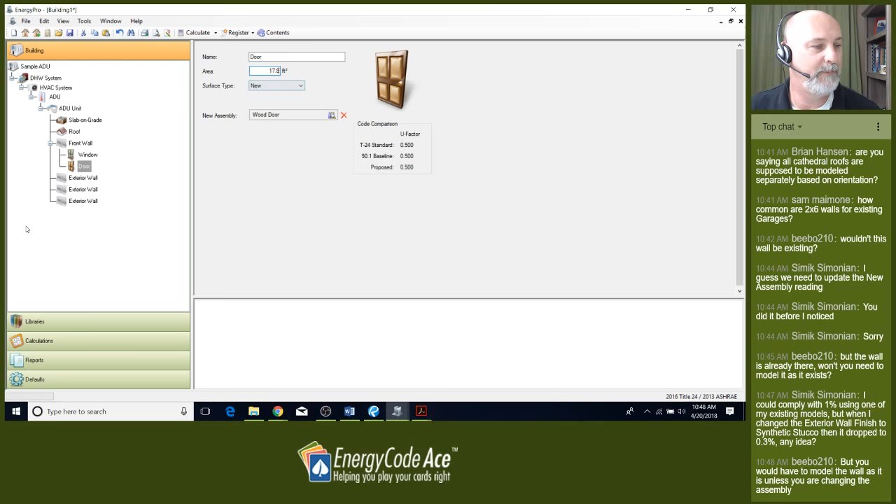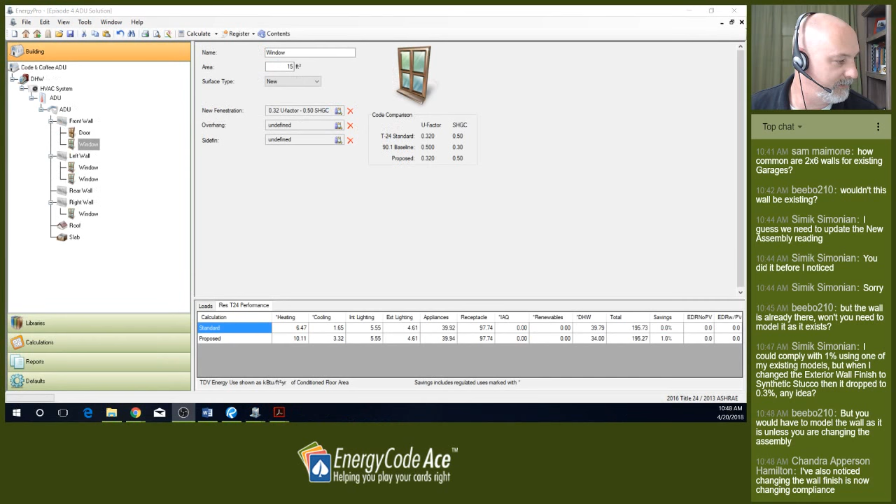All right, back to our doors and windows here. We'll get to the question from beebo210 in just a second. Let me do my left wall. Again, I go clockwise. Starting with the front, my left wall is at the top of the screen. If you look at the plan, let me just minimize this plan. My left wall is up here, that 18-foot dimension. Okay, so always keep things relative to where I'm at.

All right, my left wall is 144 square feet. It's a new wall. I need to select my assembly, this new R19 plus R5 wall. Orientation is 317 degrees. Tilt 90. I'm good there. Left wall has 2 windows. We're adding a new window.

And if you're not familiar with EnergyPro, I just right-click on my wall and click the Add Window feature. Since I have 2 windows, I'm going to add 2 windows there. The first window is 4 square feet, and that's going to use this 0.32 U-factor, 0.50 SHGC window. It's a new window. You could also model those as default values if you wanted. If you had no idea, you could go to Table 110.6-A and B, which the software effectively does if you choose the defaults there. You just need to configure it correctly.

Window number 2 is 9 square feet. Same performance factors apply there. My left wall is good. My rear wall, let's enter those characteristics here. Rear, you might have different names for these surfaces. I like to just call them front, left, rear, and right. So it's 192 square feet.

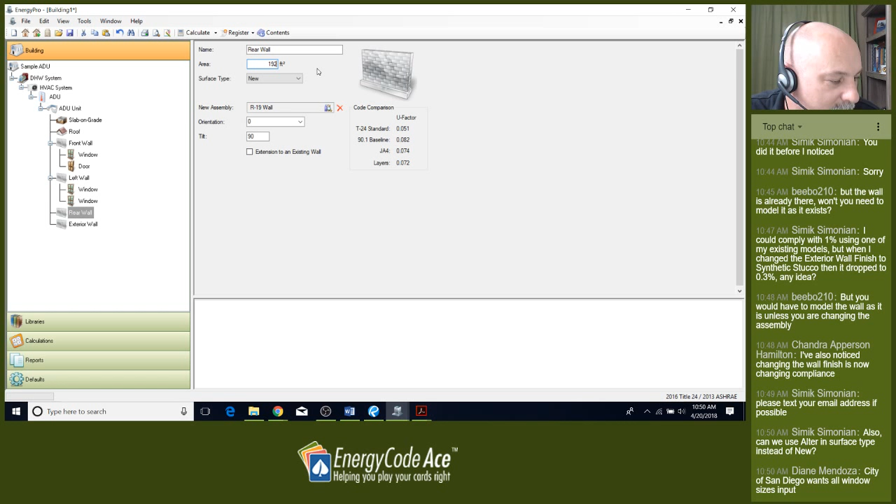All right, let's take care of some chat questions here. beebo210: but you would have to model the wall as it is unless you are changing the assembly. Okay, we're using the CBECC-Res workaround in this case. We're not modeling the wall as existing. We're modeling the wall as new. We're modeling it with the prescriptive 0.051 characteristics, and we're going to explain to the building department the exception that we used.

This is the risky part because it opens the door to a lot of confusion. And I agree 100%. We're just going to model it this way and try to address that and clarify that to our building department. I know personally, I'd probably take just a little bit different approach. But I know this is confusing. Bear with me. We'll have a solution at the end here. Okay.

Chandra: I've noticed changing the wall finish now changing compliance. Okay, so you notice a difference there. Maybe we'll have Lindsay put the email address in the text window there.

And then Diane says, City of San Diego wants window sizes input. Yeah, some building departments want you to say what the window size is on the inputs. That's great. You can do that. Just enter in the window name, enter the size. So, okay. Let's get back to the rear wall. We're running a little bit behind on time here. I want to speed this up, so bear with me. I'll try to address your questions as I can.

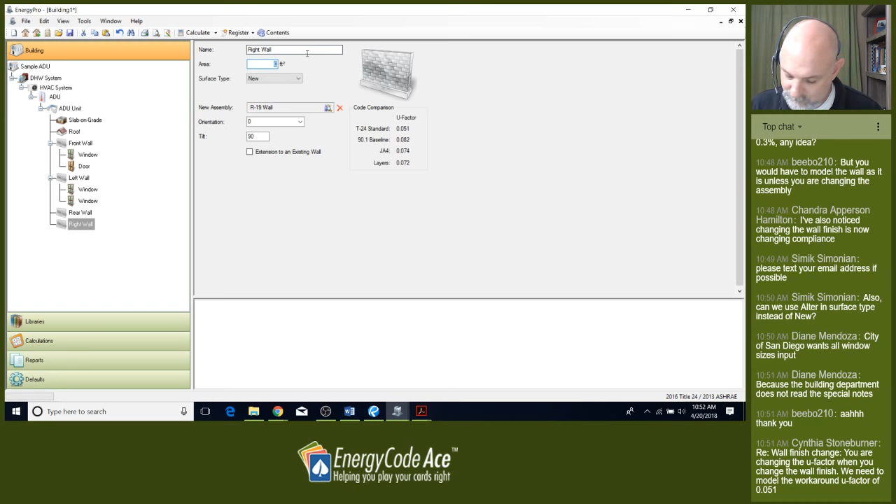Rear wall, I want to change the assembly to our prescriptive assembly. The orientation is 47 degrees, and we have no windows there. Our right wall is 144 square feet. It also has that prescriptive 0.051 default wall here. Orientation is 137 degrees. We do have one window in that wall. It's 10.5 square feet.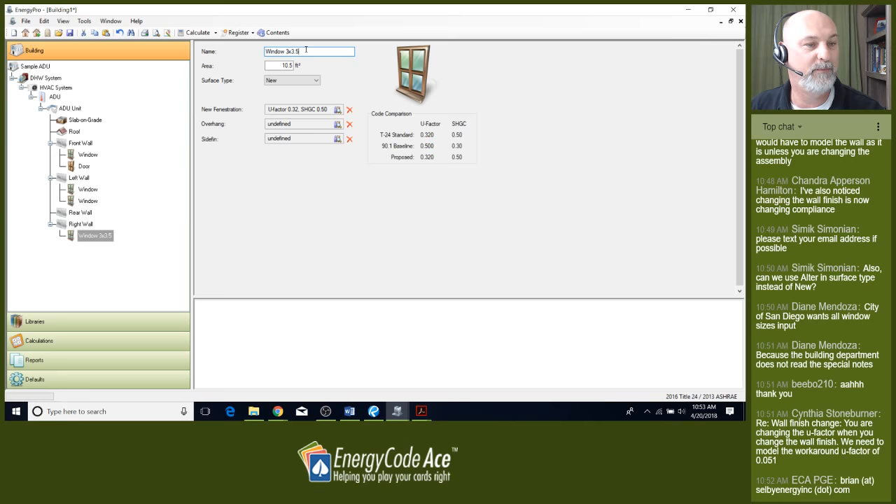So to Diane's point here, we could do a 3 by 3.5 if you wanted to add the window sizes into those, or if you had a window schedule tag or something like that. So keep in mind that EnergyPro is going to add a number to the end of this. It's going to say window 3 by 3.51, or window 1, 2, 3, 4. So just keep that in mind.

So, okay, we've got our building. Let's just go back through and make sure that we have everything done correctly. We have an ADU. It's an addition. Okay, I'll take care of the chats here in a little bit. So keep chatting. I'll have to address these in just a few minutes. We'll probably have to wrap up with some answers to the chat window.

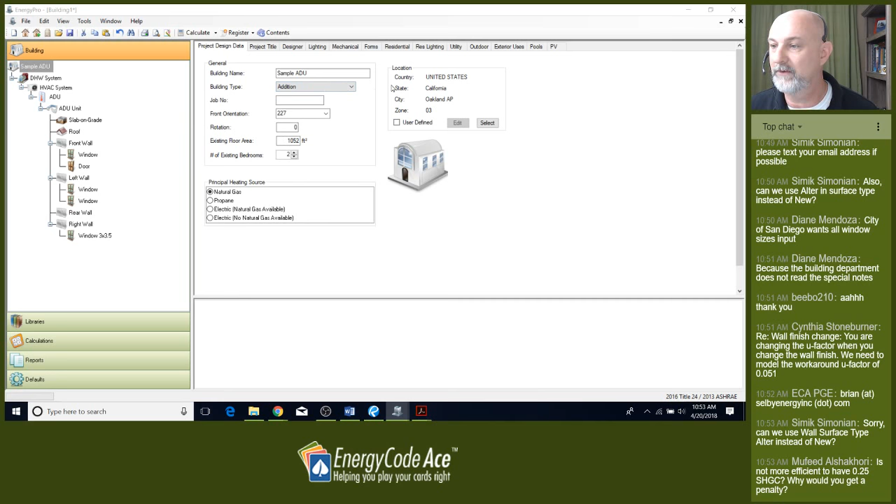So we've got an ADU facing 227 degrees. The existing house that we're adding onto theoretically is 1,052 square feet, 2-bedroom. It's in Oakland, California, climate zone 3, natural gas. Our DHW system is a gas tankless system. It has a 0.93 UEF, uniform energy factor, 0 gallons, 180,000 BTUs input.

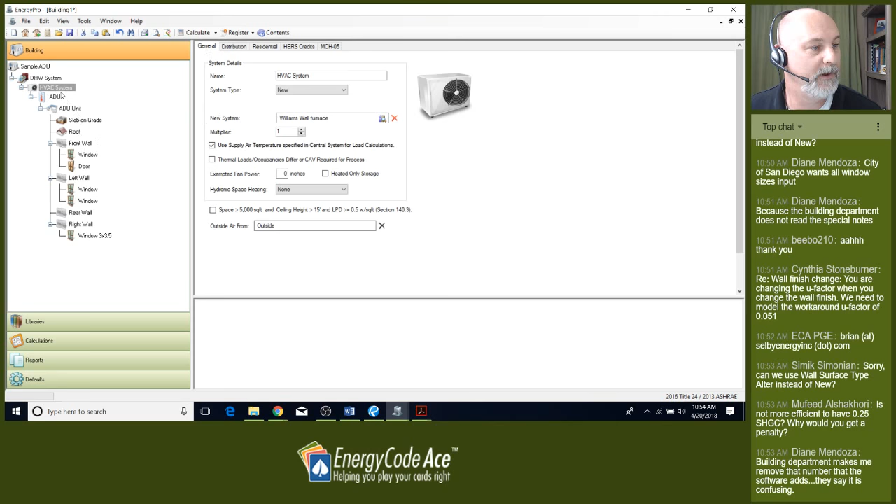Our HVAC system is a gas wall furnace, 67 AFUE. Distribution is going to be ductless, no fan on that. Our zone, we've got a conditioned zone, single floor, 8-foot ceiling height, 2 bedrooms. I unchecked all the appliances, and our room is 382 square feet. So we entered our slab information, our roof information, all of our walls, windows, doors, ceiling, floors.

So we hit calculate here, and I've gone ahead and calculated this just for the sake of time, and we come up with an energy savings of 1.0%. Wow, just by the skin of our teeth that we complied.

Now, we want to address this issue about informing the building department, right? We want to look at adding some sort of remark here. So this is the remark I came up with. I like to highlight, hey, plans examiner, please review the following note to clarify what is to be installed concerning wall insulation. So I've taken the Energy Commission's suggestion and then added to this.

So I'm adding this note. This project consists of converting an existing detached garage into a newly conditioned ADU that was modeled as an addition. So I'm clarifying it right up front. Okay. All exterior walls were modeled with the prescriptive wall requirements for climate zone 3. That's the 0.051 U-factor.

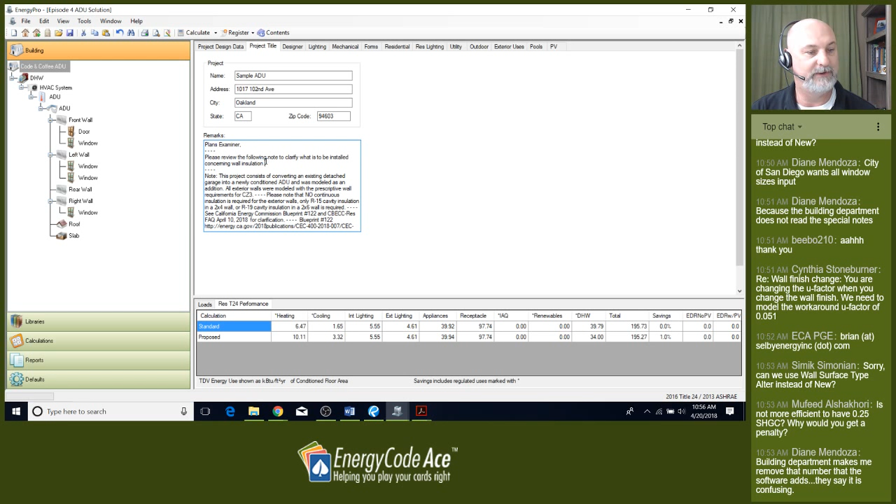Please note that no continuous insulation is required for the exterior walls, only R15 cavity insulation in a 2x4 wall or R19 cavity insulation in a 2x6 wall is required. See California Energy Commission Blueprint number 122 and CBECC-Res FAQ April 10, 2018 for clarification. Then I've added these links to that.

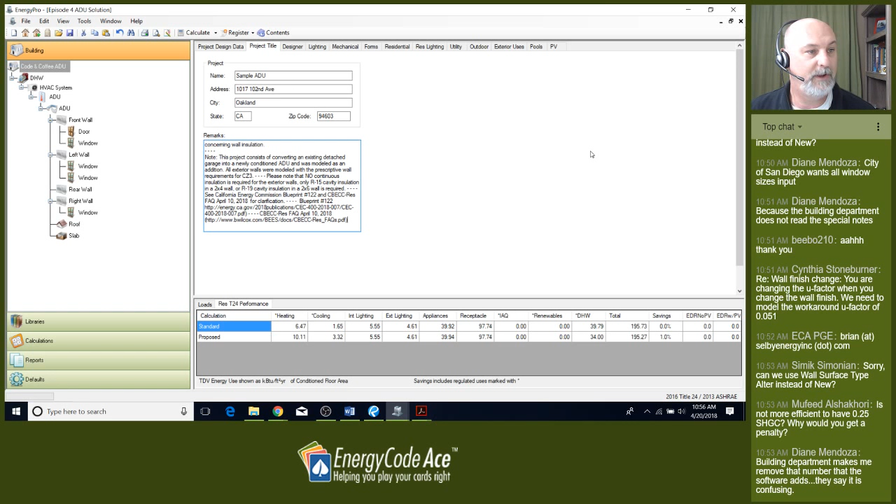Let's take a look at our results here from EnergyPro and just verify that these results are good to go. Let's scroll down here and get to our page 1. Oops, sorry about that jumping around. So just to make sure that we got this right, we're Climate Zone 3, Oakland, California, 382 square feet. It was modeled with a front orientation at 227 degrees. It's a single zone, natural gas is available. 2 bedrooms on the existing, 2 bedrooms on the addition, right? So that's calculating that correctly.

Here's our proposed design, 47.43 thousand BTUs per square foot annually. Our compliance margin was 0.48, which has a 1% improvement. So it complied, right? We may want to make recommendations to the client to exceed that, or we may have to tweak a few things. The window assumption that we took may not be the right window assumption. So these are the types of communications that you definitely want to bring up with that client.

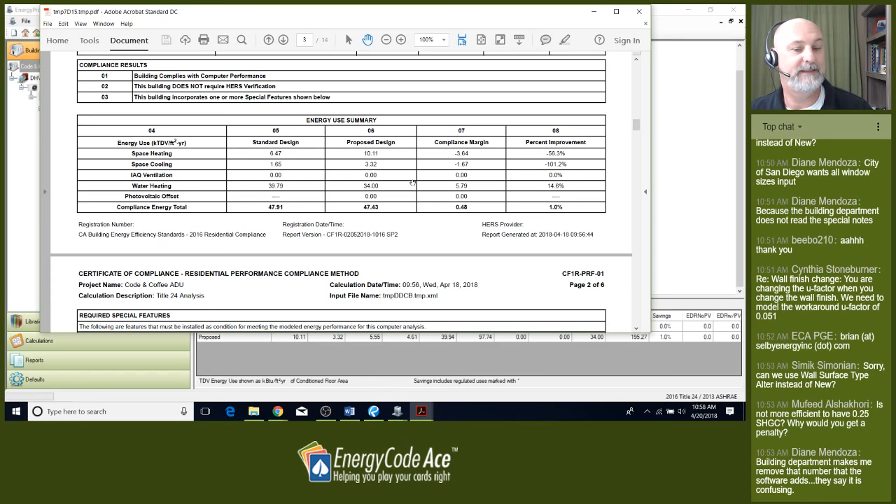Hey, let's talk about windows. Let's talk about wall construction. Let's talk about attic ceiling insulation. Are you replacing that roof? If so, can we take advantage of a cool roof? Things like that. Funny thing is, this particular project, because it's an addition, didn't have any HERS verifications. Therefore, we don't have a watermark saying that this needs to be registered. So in this situation, we could submit this without HERS provider registration. So no HERS features there.

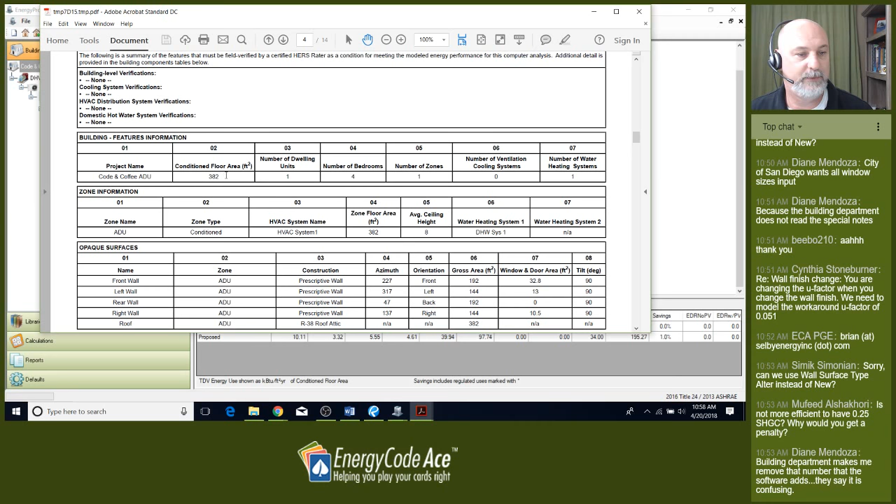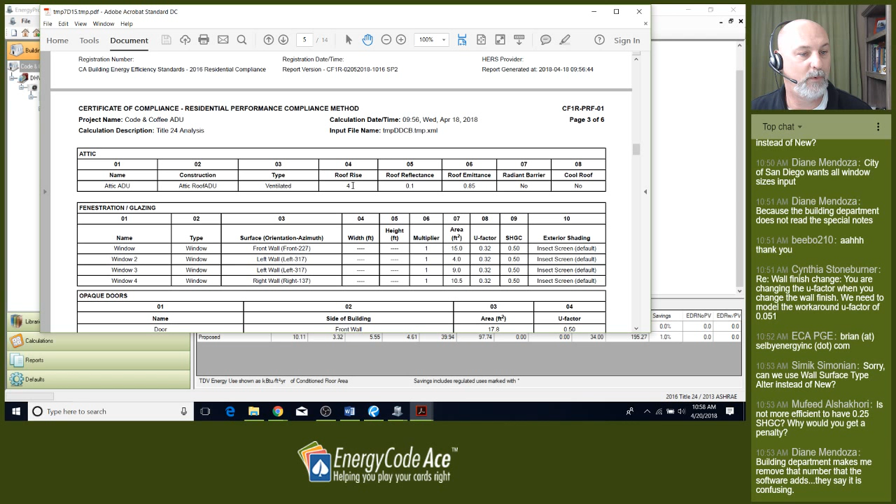Conditioned floor area, 382 square feet. Take a look at our conditioned zone. We're good there. Ceiling height's 8 feet. We've got our prescriptive wall. That was what the Energy Commission instructed to input as the construction type. All of our orientations are correct. Our areas are correct. Let's look at our attic. We got a 4 and 12 pitch. We don't have a cool roof. We don't have a radiant barrier. We're good there. We've got 4 windows.

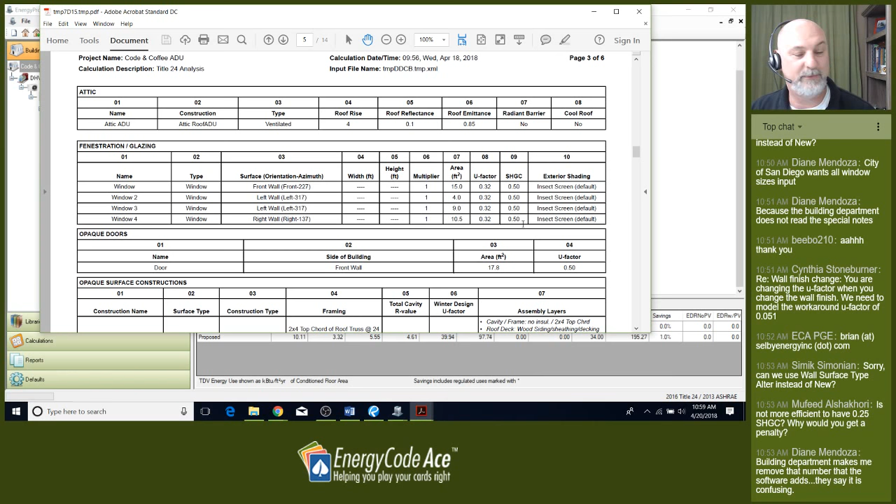We can verify these. Front wall is 15 square feet. Left wall is 4 square feet and 9 square feet. And then our right wall is 10.5 square feet with these performance characteristics here. And again, that 0.50 solar heat gain coefficient, make sure your client realizes that if you're in climate zone 1, 3, or 5, they don't have a solar heat gain coefficient requirement here.

These are our opaque surface constructions. We've got our attic roof. That's the roof portion of our attic. All right. We also have a ceiling below that. So we're not putting in the insulation at the roof framing. We're putting our insulation at the ceiling framing. So R38 at the ceiling.

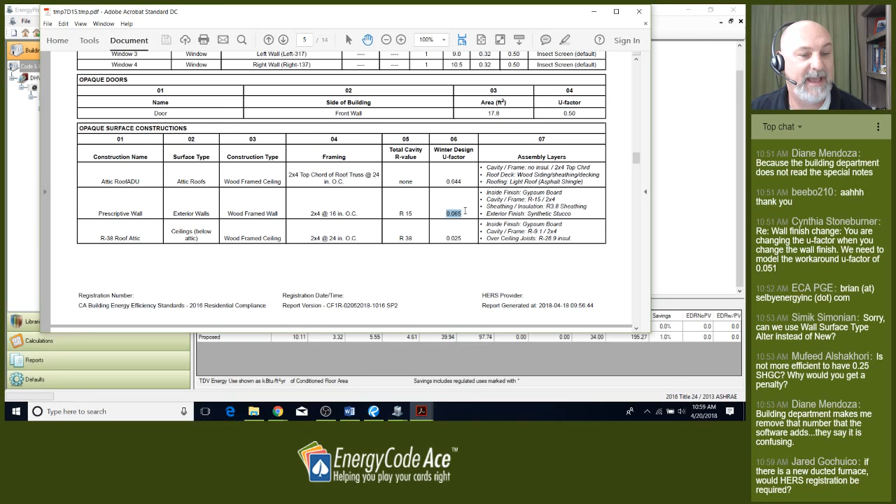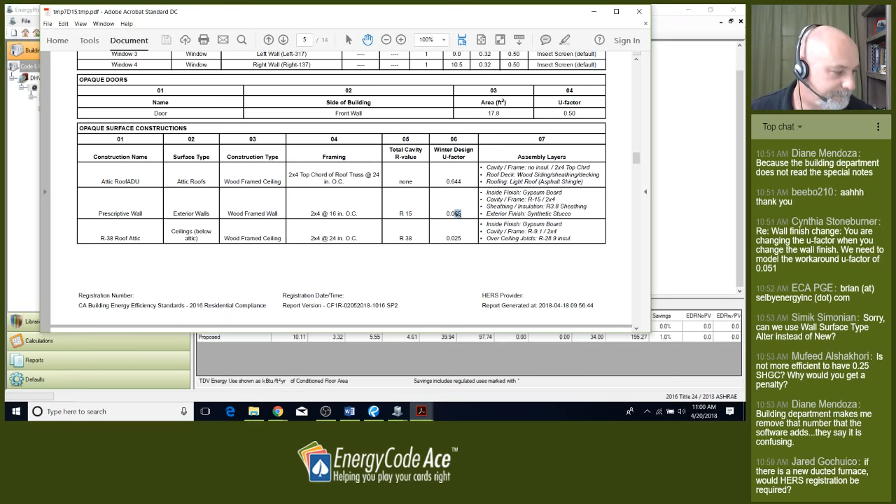Actually, in my sample, I did model this as a 2x4 with R15 in that wall with the R3.8. So yeah, so here's it done 2 ways. Either way, as long as, actually that came out 0.065, we're actually going to be better. So I apologize for that one. I should have caught that. We should have gotten 0.051 wall there, which is going to make our compliance margin a little bit better.

Slab on grade, we're good. A DHW system, single water heater. It's a consumer instantaneous with a UEF of 0.93, 188,000 BTUs. Our heating system, gravity wall furnace with a 67 AFUE. Now, here's where my project notes came in. These are my remarks that I'm making. Hopefully this will be clarified.

Now, I may want to also do a separate letter to the plans examiner and submit that along with my compliance documentation, just to clarify this exception that's going on. Now, I'm not sure if I'd take this route with my client, depending on the building department, but if I called the building department ahead of time, talk to the plans examiners, talk to the building official and say, look, hey, what do you guys feel about this approach? Do you have any heartburn over it? Do you need any more information? What can we do to make this happen in this situation?

So otherwise, I'd probably go the prescriptive route, a prescriptive addition on this particular project, because other than maybe a radiant barrier or cool roof, we'll have to take a look at the prescriptive requirements.